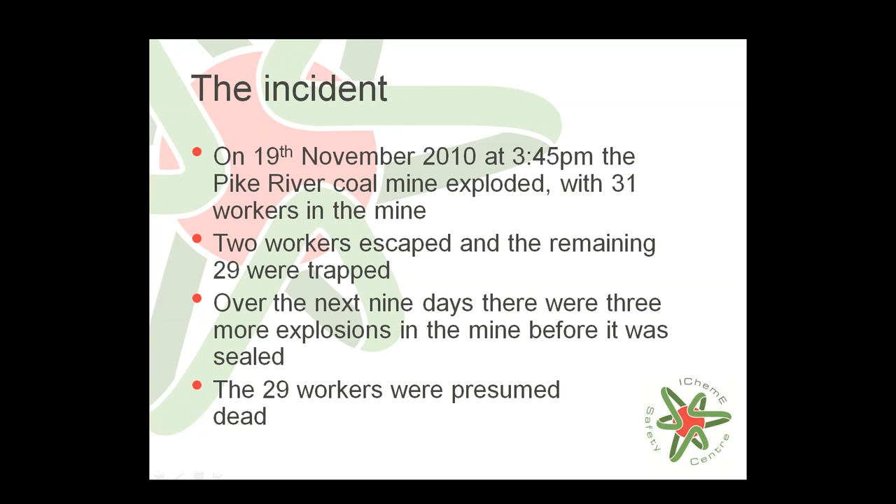Let's look at the history of Pike River Mine. In 1982, the Pike River Coal Company formed. In 1998, it was acquired by New Zealand Oil and Gas Limited.

Over the next several years, up to 2005, exploration was conducted and some permits obtained. In 2005, the decision was made to develop the Pike River site. In 2006, construction of the access roads commenced.

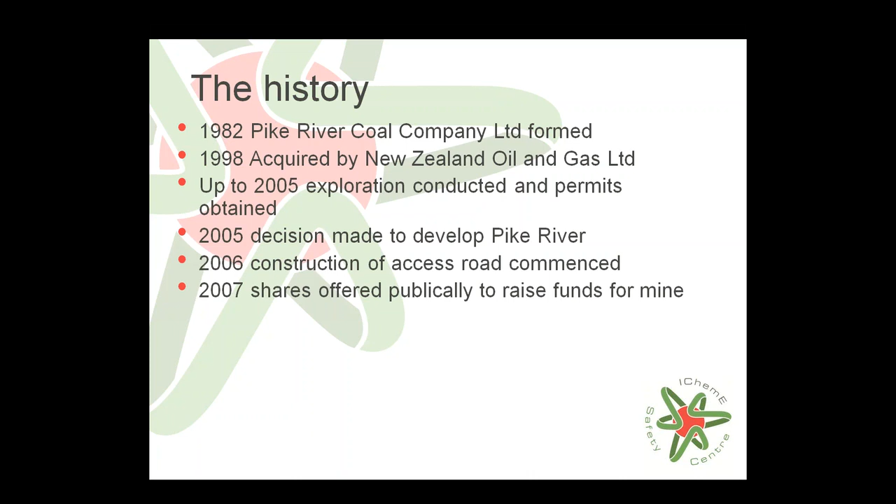In 2007, shares were offered publicly to raise funds to continue the construction of the mine. And in 2008, the mine was officially opened. By 2009, the development of the pit bottom had finally commenced.

But in 2010, further capital was raised and, in fact, money borrowed, which increased the company's debt to continue to develop the mine. Following these delays and need for extra money, the CEO actually resigned in September 2010. In November 2010, the coal mine exploded.

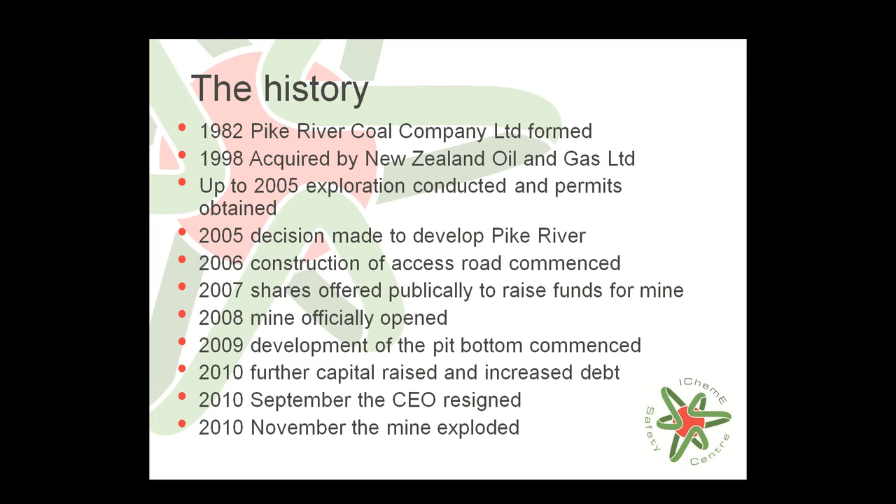So today, we're going to look at this through the elements of leadership, culture and design, while exploring some of the decisions that were made. These areas are detailed in the Pike River Commission report, which is available as a download from the New Zealand government website.

But what I want to do first is, looking at some of these signs, start looking at the leadership aspects that we saw in the mine development.

So firstly, the company was under substantial pressure. By the time they'd decided to construct the roadways, they'd spent some $63 million on the initial development. They then actually went to the capital raising and raised a combined $143 million to complete the mine. This was raised in what we'll call year 1, and there were no delays anticipated at this point in time.

Year 2 was anticipated to be further development of the mine, with the mining of approximately 24,000 tonnes projected. It was anticipated that by years 3 and 4, the mine would be cash positive, and they would have started hydro mining in the 3rd year and would be producing substantial volumes of coal coming out of that mine.

Focusing on the site leadership in particular at this point in time, the management team consisted of several people, but importantly, it actually lacked a ventilation engineer. This role was filled by the mine manager. However, the mine manager was busy being a mine manager, and the role of a ventilation engineer in an underground coal mine is a critical position in the organisation.

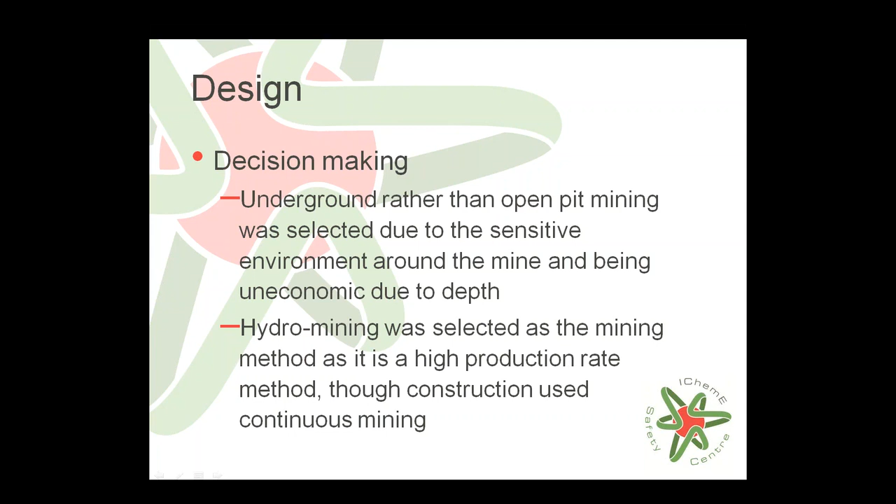Once that decision was made back in the 90s, it was never reviewed again. So even when they later gathered more information about the geological formation, they didn't consider changing the way they were going to mine.

Let's understand a little more about methane in the mine and its impact. The coal seam at Pike River had about 80 to 90% methane in it. Methane is flammable when mixed with air between 5 and 15%, and it's lighter than air.

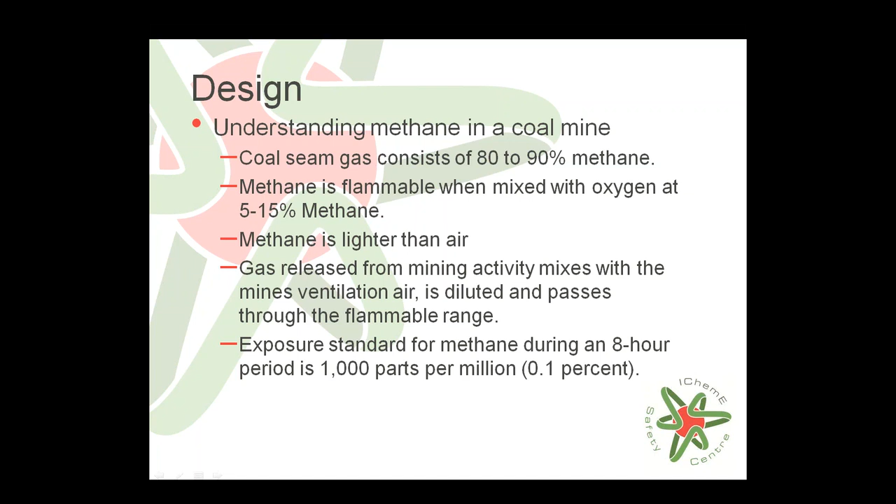When gases are released from mining activity and enter the ventilation system, they are diluted, but they do pass through the flammable range at that point. From a human health perspective, the exposure standard for methane over an 8-hour period is actually 0.1%.

The actual methane content within the coal seam was measured at between 7 and 7.5 cubic metres per tonne. It was determined that this level would be very difficult to control through ventilation alone, so pre-drainage was developed with an aim to reduce it to less than 3 cubic metres per tonne. This concept needed about 6 months of pre-draining to have any hope of reaching that level.

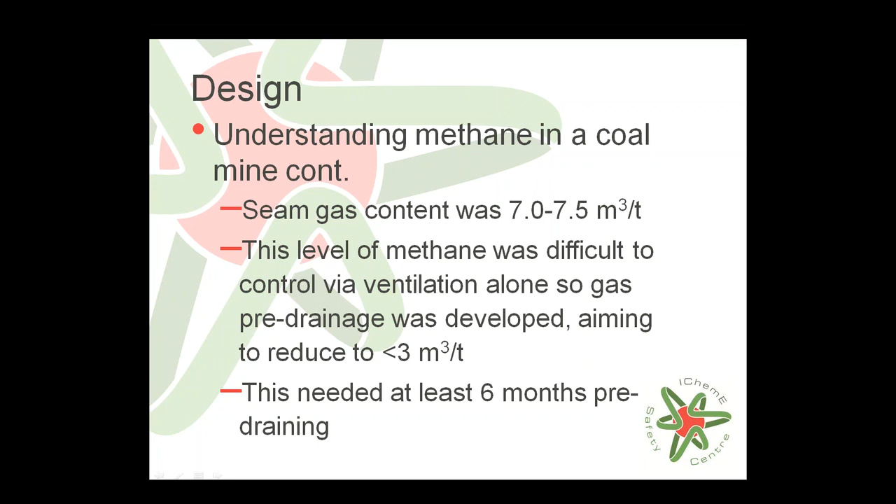Pre-drainage consists of drilling holes into the rock and allowing the methane to come out of the formation and vent away, since it's at a higher pressure than atmospheric pressure. The gas is slowly released and taken away through the ventilation shaft, floating up because it's lighter than air.

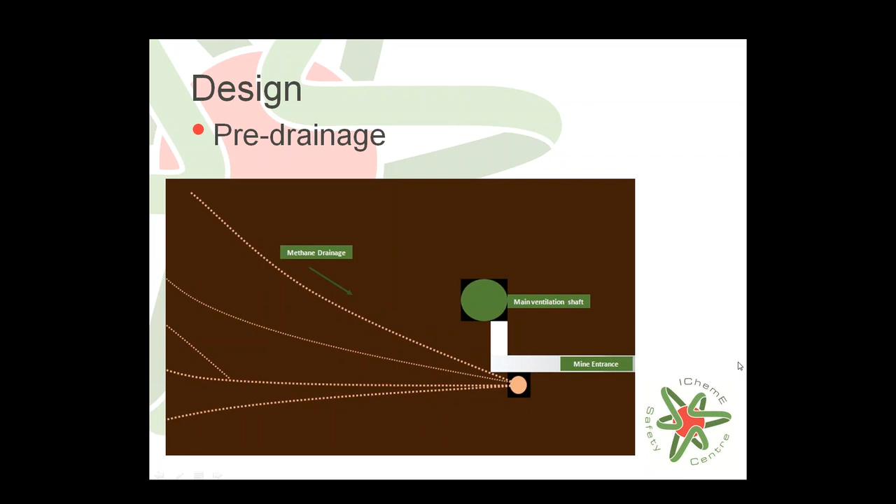When they started to construct the roadways, now taking a vertical slice through the mine, construction first commenced with development of the mine entrance. They'd expected the rock to be 90% stone, which would self-support, but it was found to be 80% poor rock. Because of this, the entrance required additional bolting to prevent cave-ins.

It was anticipated that developing the mine entrance would take about 6 months, but it actually took 12 months and cost twice as much. They did eventually construct a mine entrance that was very well built, 5.5 metres wide and 4.5 metres high, bolted appropriately to maintain stability.

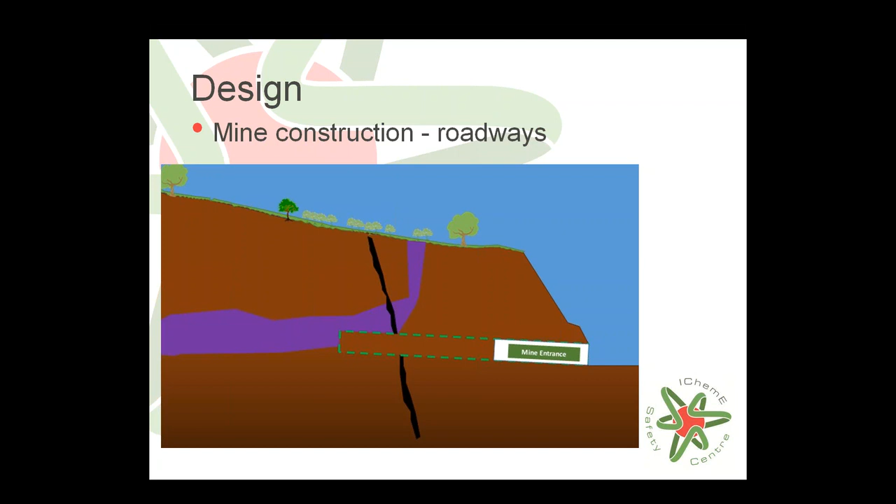Once the mine road was constructed, they then needed to look at how they were going to build the ventilation shaft. There were four methods considered in building the ventilation shaft.

The first method considered was a blind sink, regarded as the safest method. It would have involved digging down from above, but it would have been very slow and resulted in a lot of spoil needing removal, requiring additional roadways in this environmentally sensitive area, plus water treatment ponds and other major infrastructure requiring additional environmental approvals. At the time, this was not considered feasible.

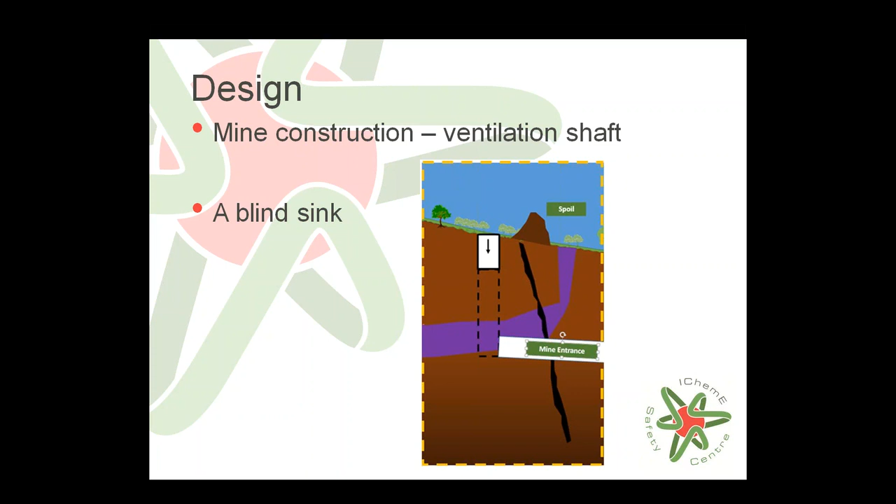The second method considered was Alimak mining. The concept is that a mine cage is raised up where workers drill and load explosives, blast away, come safely out of the area, then shore up the sides of the shaft as it's built upwards. The spoil can then be removed through the main mine entrance roadway.

This method was actually recommended by the contractors and consultants for the particular soil type they were dealing with. The main drawback was that it wasn't the fastest method to create a ventilation shaft, and they'd already lost 6 months on the construction of the road, so this method was rejected due to the additional time it would take.

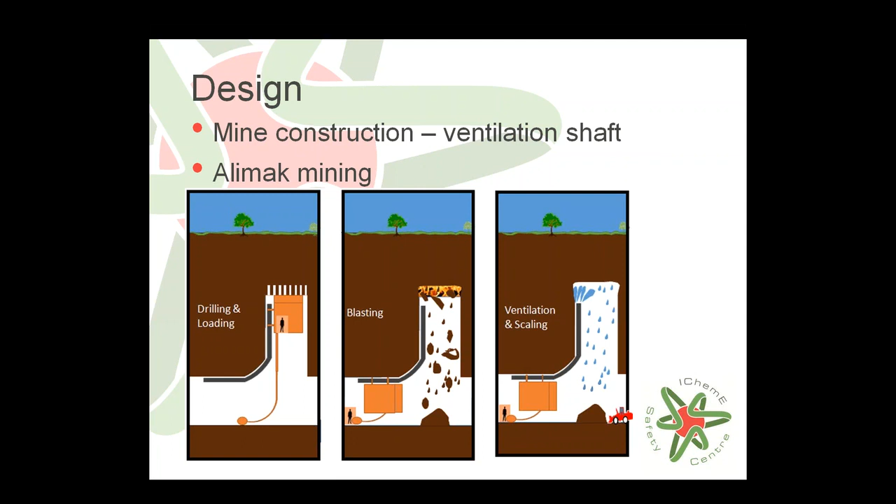Thirdly, they considered a second access path: creating the ventilation shaft. This would have provided a secondary exit point in case of an emergency, and a number of people recommended this method for that reason, as it would be a safer way of drilling into the rock. Unfortunately, this method would have been very slow, as with the first entrance, taking twice as long and costing twice as much. It was rejected due to the large delays and significant costs involved.

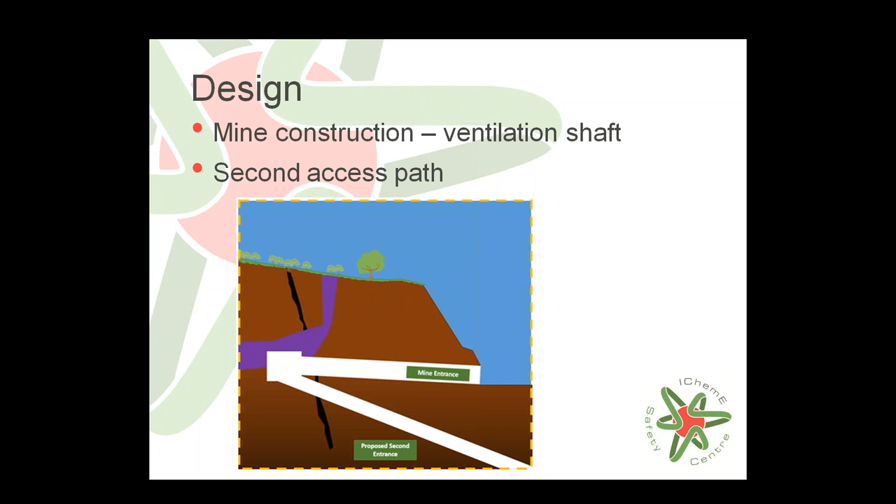This leads to the fourth method, the one actually chosen to create the ventilation shaft. It's called the raise bore, and it involved placing a machine at the top of the mine, drilling a small borehole into the cutting, and then pulling the mechanical reamer up through that hole. This was the fastest and cheapest option, but it was not suitable for the soft soil of the area, and since you can't reinforce the sides until it's complete, it placed you at risk of a cave-in.

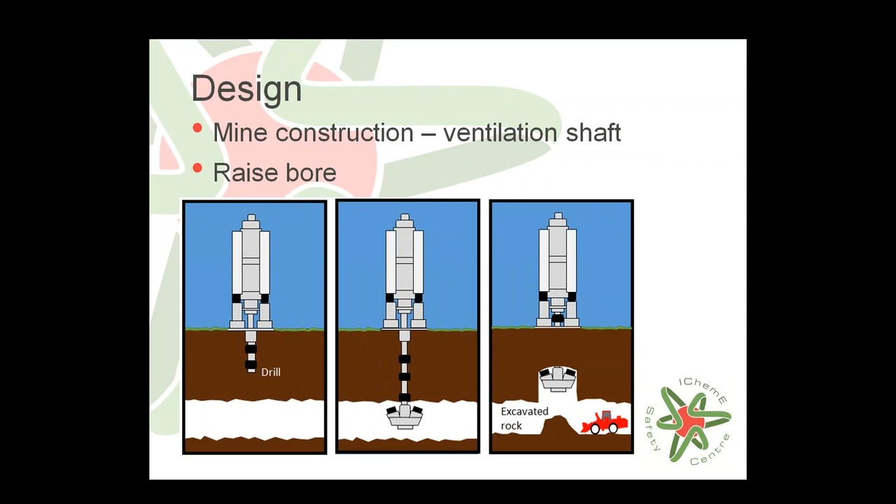Nevertheless, this method was chosen despite the engineer brought in to undertake the work recommending against it due to the soil type. The equipment had already arrived on site, and switching to a different method would have caused more delays and cost more money.

Even though the geotechnical engineer sent out to undertake the work recommended against doing it once he had core samples and produced a report, they looked for what they could possibly do to make it a safer option to drill. They discovered the bottom 44 metres was not expected to support itself, and the engineer recommended using the Alimak mining method instead.

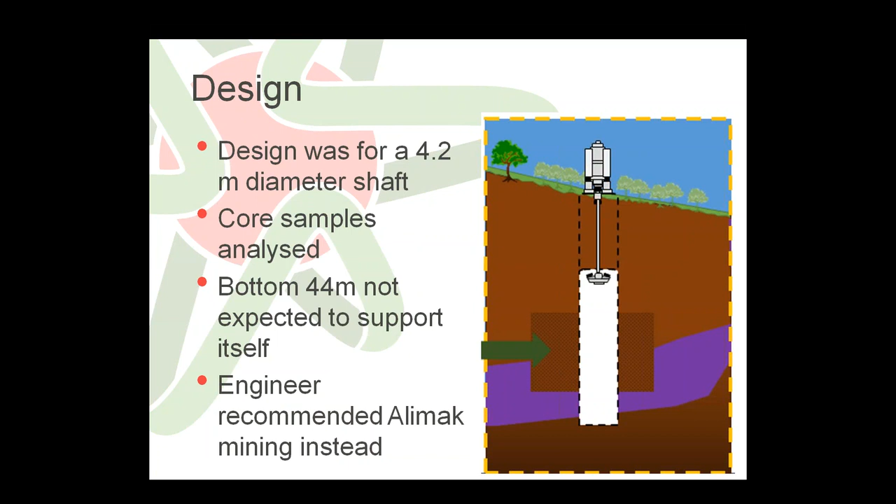When they went to create the ventilation shaft, the geotechnical engineer gave further advice to try to ensure success. He suggested using 14-metre-long steel bolts to pin the bottom of the mine shaft to the harder sandstone above, laying a concrete tunnel so vehicles could remove the extracted earth more quickly without getting bogged, and creating a working bay a short distance from the shaft to place the spoil, reducing the time to clear the loads.

However, the actions eventually taken were: 8-metre-long steel bolts were used rather than the 14 metres recommended, because they were already available on site and it wouldn't cost time or money to purchase the longer bolts. They chose not to lay the concrete, as that would take weeks and cause delay, and chose not to create a working bay for the spoil, having confidence they'd have enough time to excavate it.

So they commenced the ventilation shaft using this method, and as the reamer was drawn up through the rock, there were some small rock falls. Before it was able to reach the top, the sides needed to be reinforced at the bottom of the mine, and that was not possible. They subsequently collapsed.

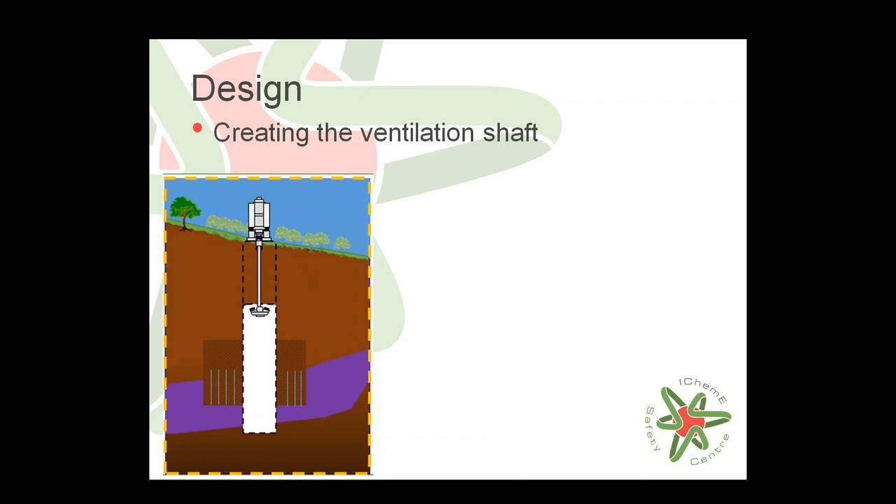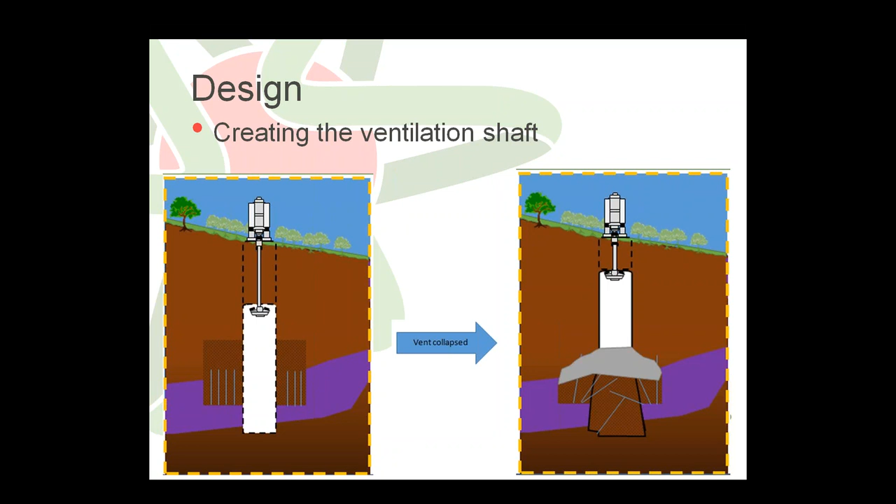This was because they removed the support of the stronger sandstone, and therefore the tunnel collapsed down. There ended up being a substantial gap, 12 metres across and 40 metres high. The top 70 metres of the shaft was actually able to be reinforced.

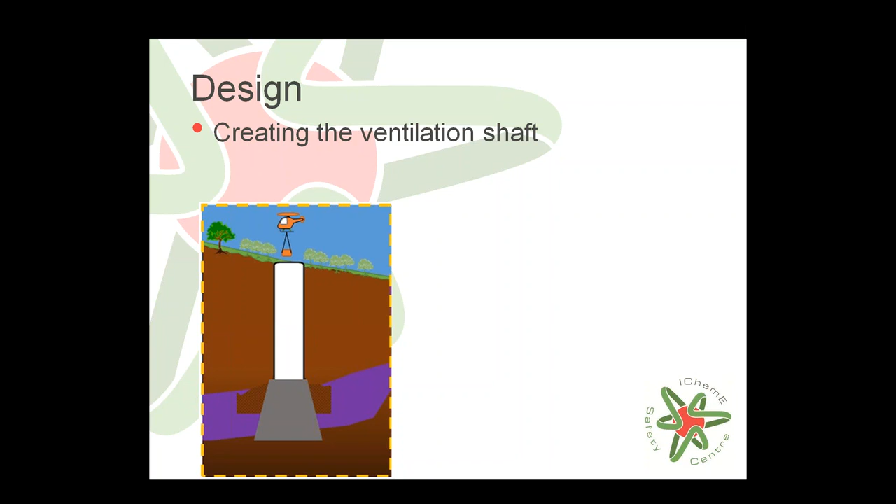To support the bottom of the shaft, they needed to fill it with concrete. They ended up requiring 1,000 helicopter loads of concrete dropped through the top of the shaft to try to shore up the base. Eventually the Alimak method was used to create a 2.5 metre diameter shaft that intersected with the main shaft. The main shaft was 4.2 metres, and they had installed a 2.5 metre shaft to reach it.

There was a plan to create a second 2.5 metre shaft, but that was put on hold due to cost, potentially creating a bottleneck in the mine's ventilation capacity. At the time they knew this, but determined it was unlikely to create any particular issues for them. Overall, this caused a further delay of 6 months because of plugging the bottom portion of the mine shaft and drilling the Alimak mine shaft.

So by now, the mine is currently a year behind schedule. They've reached the second year, when they were supposed to start becoming profitable, and they've not yet developed the mine into any hydromining. During the second year, the company had to continue raising capital, collecting approximately another $140 million through both capital and loans.

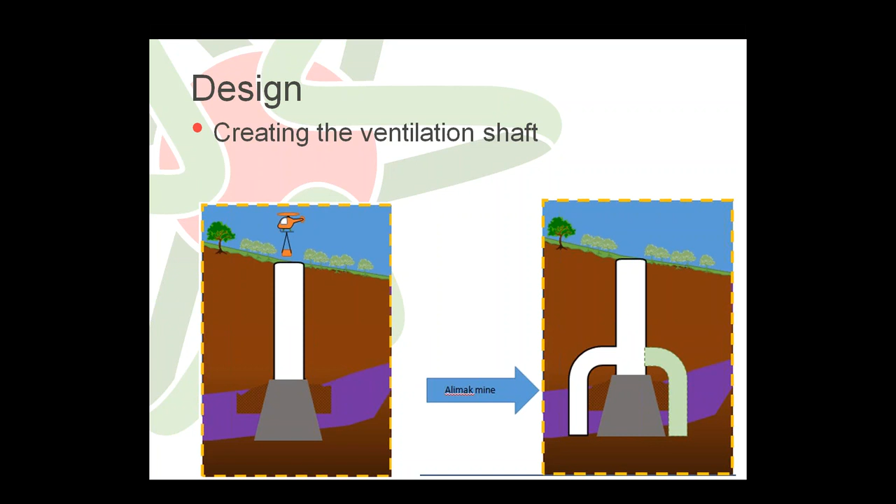Given that the ventilation shaft was not complete, it was thought that more ventilation was required, so they drilled an extra slimline shaft of 6 inches to assist with ventilation. To reduce time and costs, they used the same drill pad that the 6-inch riser was used for the gas drainage.

They couldn't drill with the methane coming from the 6-inch riser, so they shut it down while the slimline shaft was drilled, and sent the contracting crew home for 6 months. This meant that although they were using that period to do the pre-drainage, they actually had to stop doing the pre-drainage because they were using the same drill pad.

A further problem with the reduced gas drainage program was that the roadways started being built at the same time. As these roadways were being built, they started to intersect with the drainage boreholes very shortly after they were drilled.

The maximum concentration of methane gas goes through a borehole in its first few months, so this created problems based on frictional ignitions, the potential for large gas volumes at the face where they were drilling the roadways, and the potential for large releases of methane at the works.

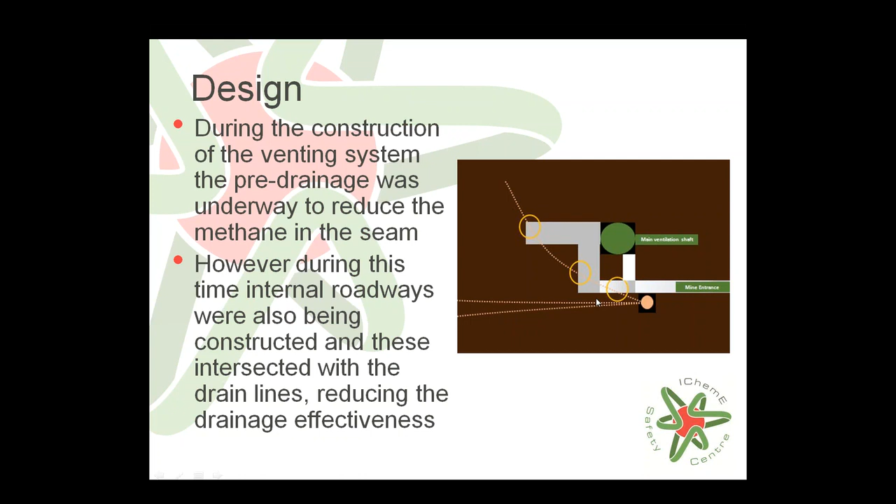This certainly affected the drainage lines as they continued to try and remove the methane. So as you can see, we've got drainage lines potentially going up here, and as they've started to drill the roadways, we start to see intersections appear.

With each intersection, they either needed to block the borehole or connect the pipework to take it to the riser. A 4-inch drain line was installed for drainage of the boreholes, and this was then connected to the 6-inch riser. So we have the 6-inch riser here and the 4-inch drain pipe here.

As the roadways were developed, the mine was set to have a fresh air side, where the air flowed inwards, and an outwards air side as well. The outwards air would have higher levels of methane. This would flow to the main ventilation shaft and then be drawn upwards. Through this circuit, they were ensuring the dilution of methane for a safe working environment.

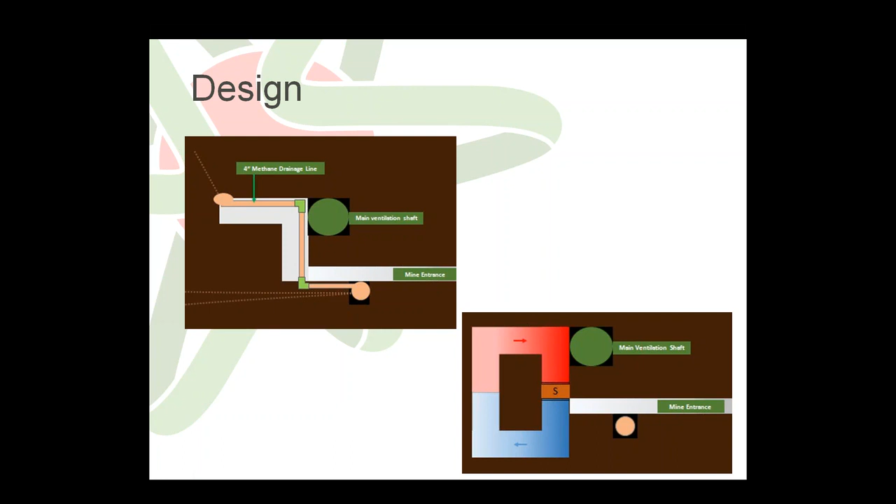The stoppings need to have a pressure rating on them, and in the Pike River mine they were set to 14 kPa. So as the roadways developed, the 4-inch methane drainage line continued to be extended as the boreholes intersected the roadways. The line grew, and then more boreholes were added and drilled in and connected to the 4-inch line.

The roadway development, however, was very slow progress. After 6 months, they were still working hard to develop the base infrastructure so they could even start hydromining. The methane lines continued to be extended.

The cause of the slow roadway construction was because they were using continuous miners, a machine that continued to break down. At the time, they were blaming the breakdowns on the operators and accusing them of not being able to use the miners correctly. However, when faced with the decision of which continuous mining machine to choose, they chose a unique prototype build because it was cheaper, rather than a commercially available and proven machine.

They also had issues because of the soft soil that they were using, and they needed to install substantial amounts of roof supports as they went through the process of creating the mine roadways.

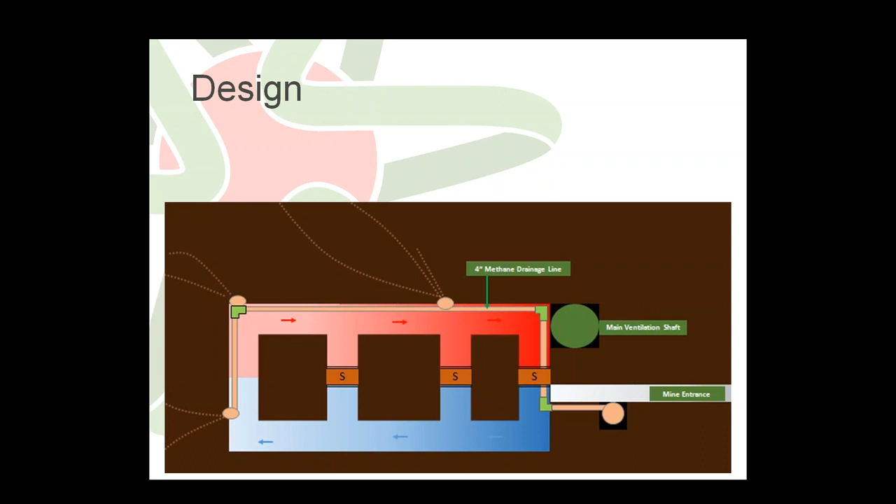Once we got near the end of the 3rd year, there started to be some concerns about the methane drainage system. The system was undersized and therefore operating at quite high pressure. Also, there was a concern because of the fresh air base having the methane drainage line run through it.

There were also frequent intersections of the boreholes that were used for the pre-drainage. These intersections created the risk of additional frictional ignitions as well as a potential for release of large gas volumes. The intersections also reduce the effectiveness of gas drainage, as the boreholes must have the pipe connected for them to continue to vent safely.

You'll also see here that part of the drainage system also started to be installed over on the far left of the diagram in the clean air inwards system. So because we started to see several concerns raised around this, the company then decided to bring in an independent assessment of its drainage and ventilation systems.

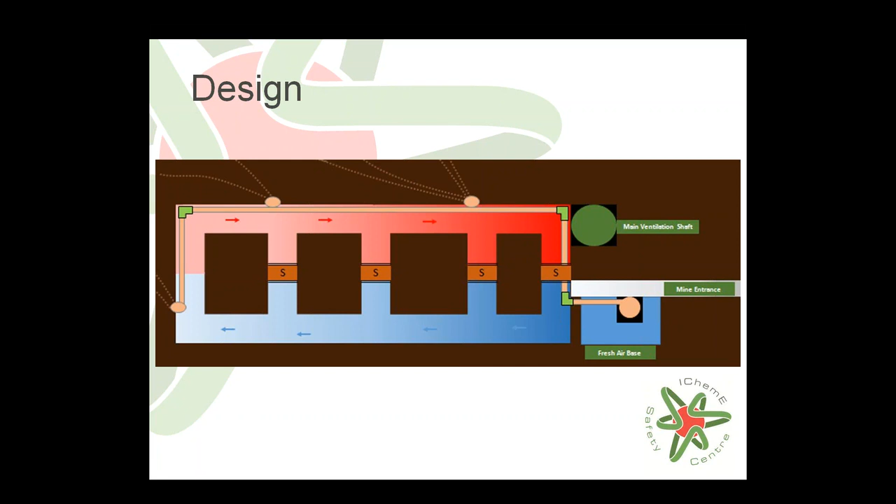So the independent assessor came in, and immediately he had a lot of concerns about the stoppings not being sufficient to actually segregate the airflow. He noted that most of the stoppings looked temporary and that they were easily knocked over. In fact, he saw one that was just propped up by a piece of wood. They also appeared to be leaking around the sides, allowing methane to enter the fresh air side of the mine.

It was noted that due to the high rise of the coal seam, the highest pressure within the gas drainage line is deeper as it goes into the mine. Therefore, it was creating restrictions as to what would flow out of the mine.

At his first visit, he made a recommendation that within 3 months, the 4-inch line needed to be replaced by a 10-inch minimal diameter line to service the current and future needs. He also said that there needed to be further increase in the drainage and water control to improve the ability to maintain the ventilation in the mine.

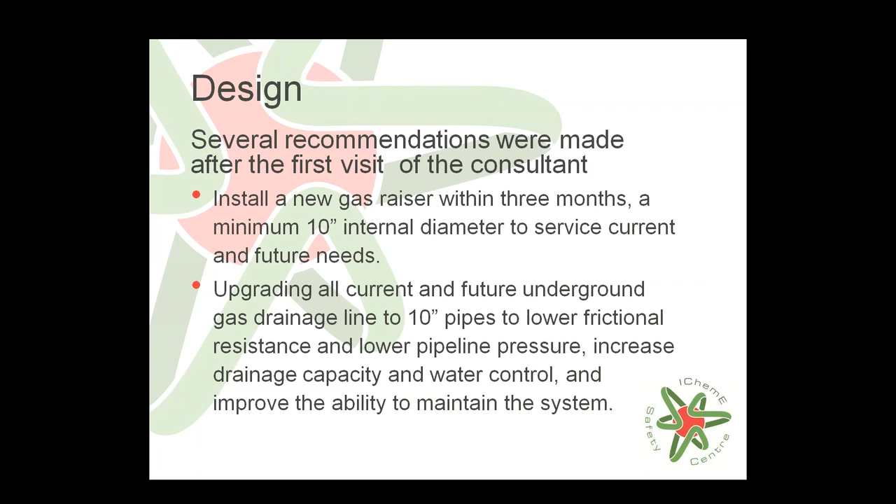This raises the level of methane in the return airways, although it was monitored to ensure that it stayed below 1%, remembering 0.1% is the occupational exposure standard.

Although this was intended to be a once-off activity, in the next month it was made standard practice to free vent almost all of the boreholes, raising the level of methane in the return airways even higher.

At the third visit by the consultant, the roadworks were complete and the hydro extraction was about to begin. But there had been no upgrade to the gas drainage infrastructure, and the underground fan had not been commissioned. There was still just a small auxiliary fan at the top of the mine on the outside. They had also not determined the outburst threshold value, how much methane could be released.

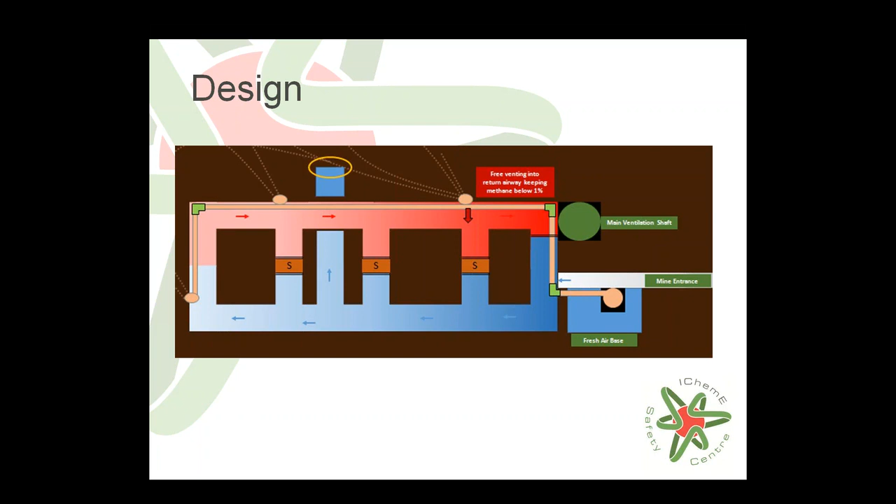So what I want to do now is move on to some of the cultural aspects that then played a part in this disaster as well.

So, as part of the final push to achieve hydromining, the company senior management offered a bonus. If the first 1,000 tonne of coal can be extracted by hydromining, then an incentive would be paid. The incentive would reduce depending on how many weeks it took to achieve. The maximum payout available was $13,000.

At the time that this was implemented, there was still no functional main fan in the mine. There was still only the 4-inch ventilation lines and certainly insufficient drainage, yet they commenced hydromining, which liberates substantial amounts of methane.

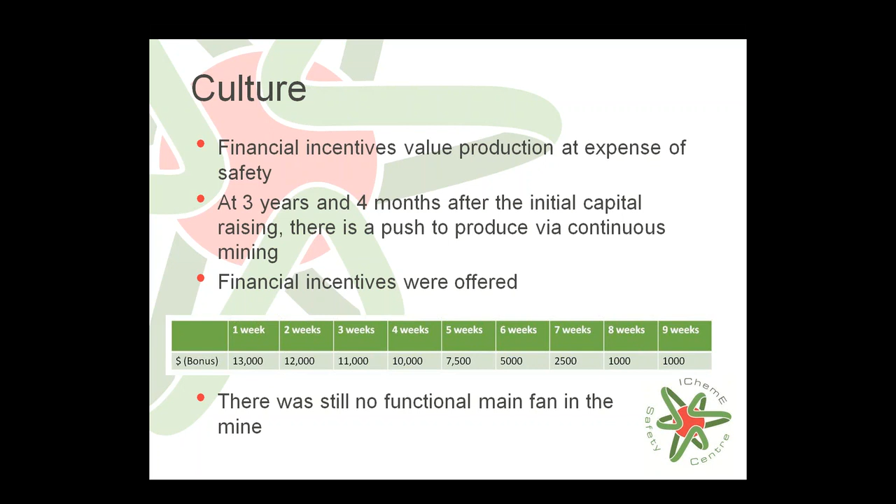So during this initial push, there was an incident where a stopping fell during a small roof collapse as part of the hydromining process, and this then further compromised the ventilation system.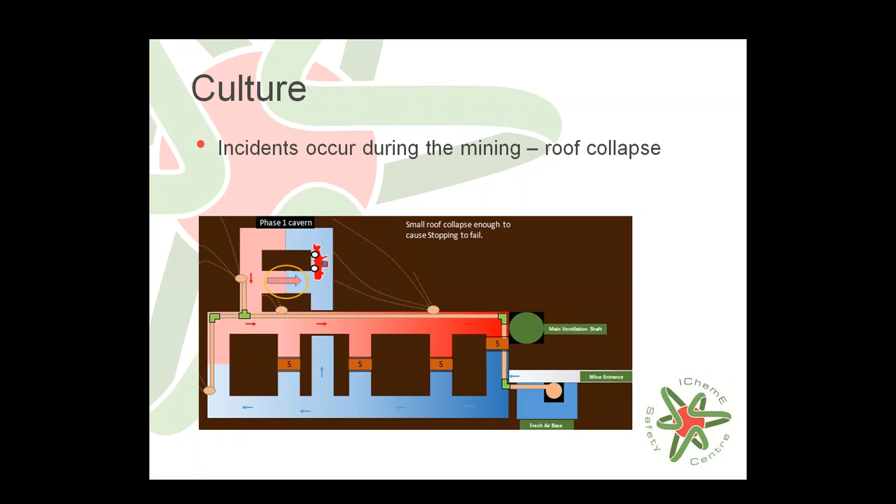Four weeks into the hydromining bonus, 1,000 tonnes of coal was extracted, and a bonus of $10,000 was paid to all staff. It should be noted though, that during weeks 1 and 4 of this incentive program, there were 9 occasions where the methane levels exceeded 5% in the return airways. As soon as 1,000 tonnes of coal was extracted, it was decided to stop hydromining until the main fan was operational.

Another near miss occurred just prior to the main fan being installed. The auxiliary fan, located above the main ventilation shaft, had a blade shear off. This shut the fan off completely, and the mine gassed out at greater than 5% methane. All personnel were evacuated, and it took nearly 2 days to restart the auxiliary fan and reventilate the mine at that point.

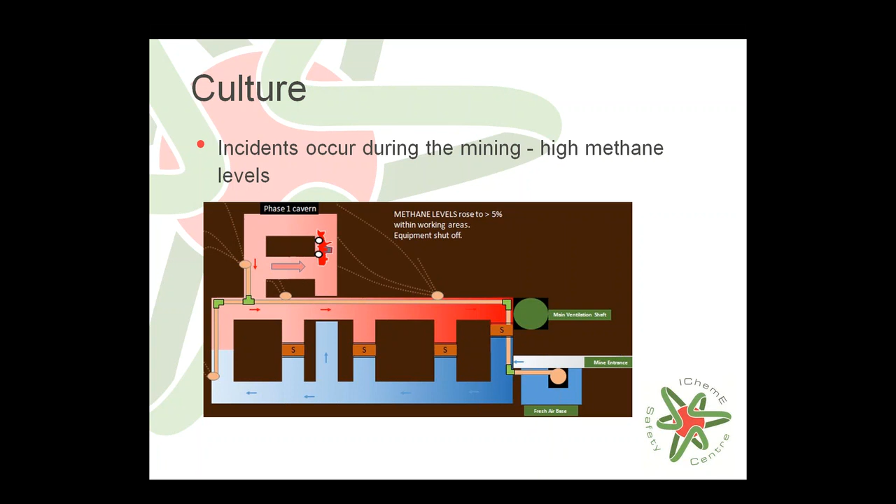So let's talk about the design aspects of the main fan being installed. The main fan was due to come online about 3 years and 6 months after the initial capital raising we spoke about earlier. During the tender process, the company did ask for the fan to be located on the surface, but given that it was a remote conservation area, this posed a lot of challenges: fan location in mountainous conservation land, access only by foot track or helicopter, no direct surface electricity, and the weather conditions were often very, very harsh.

Due to this, the 2 vendors that tendered proposed to put the fan underground. Now, this was the first time anywhere in the world a main fan would be located underground, and concerns were raised for both the above and the underground fan options. The company decided to go with the underground fan.

So a hazard study was conducted, and it raised some issues. There were concerns that the main fan could be destroyed by explosion. It could result in employee injury, business interruption, suffocation from methane in the mine. Two of these risks were initially rated as unacceptable in the risk assessment but later revised to low risk in light of varying controls.

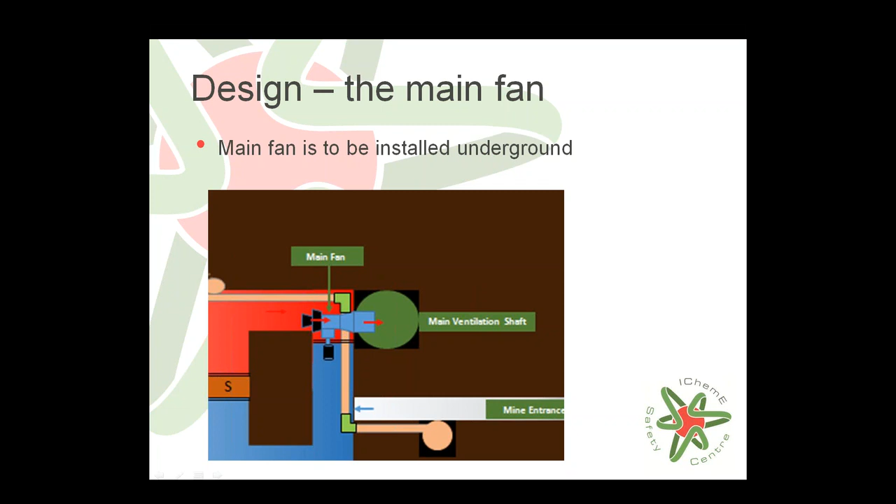Importantly though, many of the controls were not implemented, including the design and layout of the installation with built-in explosion proofing, the installation of sufficiently sized blast panels to protect the surface fan, and the fan being sited in a solid rock house. So consequently, we see that we have the ventilation fan underground, unprotected sufficiently, in a mine that produces high levels of methane.

So in terms of key leadership learnings, obviously we saw financial pressures versus safety requirements. But interestingly, it cost more and took longer when they kept going for short-term financial benefit rather than the safer option. From the design perspective, there was a pursuit of shortcuts to try and reduce the lead time and cost to build the mine, and a lack of suitable assessments and rigour prior to making significant design decisions. Lastly, there was a culture of the push for production without necessary and required safety measures, and a total lack of action on the incidents they were having.

So at this point in time, I'd like to ask a couple of poll questions. The first one I'd like to ask is, while this was certainly an extreme case, have you seen similar activities occur?

I'm starting to see the responses come in now. I have both yes and no responses to this question. I've got almost everyone voting now, so I'll close off the poll and share those results with you. We can see 73% saying yes and 27% saying no. So I think that's, whilst probably in my experience quite accurate, possibly quite a concerning result. Let's take a look at the next poll question.

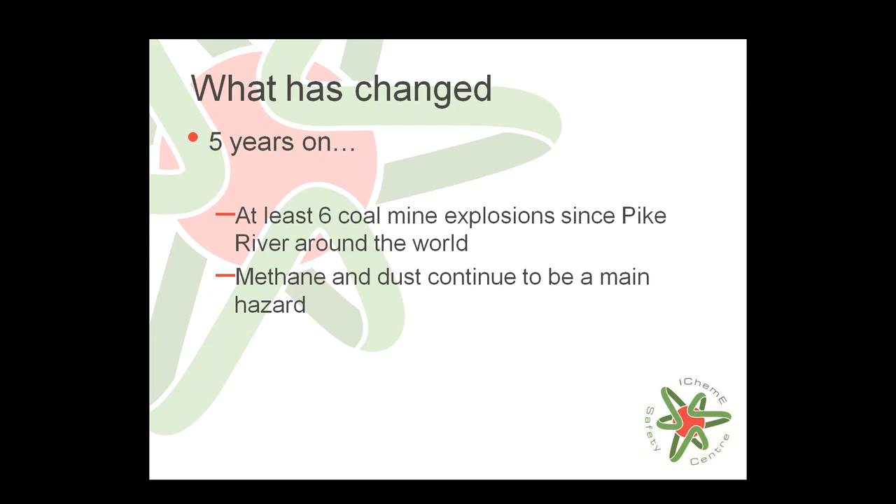Okay, so let's then talk about, we're now 5 years on, what's actually changed? Well, around the world, there have been at least 6 coal mine explosions since the Pike River incident happened 5 years ago. Understandably, methane as well as coal dust continue to be a main hazard in coal mining underground, as we've seen. There's also been examples of open pit mines where there have been substantial fires as well.

Importantly, in New Zealand, one of the things that we have seen is the New Zealand government moving to a new legislative framework, because there were certainly findings that were adverse about the New Zealand legislative framework that led up to the Pike River coal mine. So the New Zealand government have taken the initiative. They're adopting the Australian Harmonised Work Health and Safety Act. It is called the Health and Safety at Work Act, and it will come into force in April 2016, and that will see quite substantial changes around how mining, as well as other major hazard activities and indeed other activities, are actually undertaken in New Zealand.

But in terms of some takeaways from today's webinar: thinking about how leadership, design and culture impact on safety in your organisation. What are you seeing in your organisations? And how can you positively influence these particular areas if you think about that?

One of the things that we see a lot of is bonus systems, the different remuneration packages that we see around in various different companies, and they can often have adverse impacts and drive unintended behaviours in organisations. So what sort of behaviours are your bonus systems driving in your organisation? And it's not necessary that we need to then change some of those bonus systems. It may be that we need to have other checks and balances in place to guard against the adverse outcomes that we might see if we purely just look at the bonus system itself.